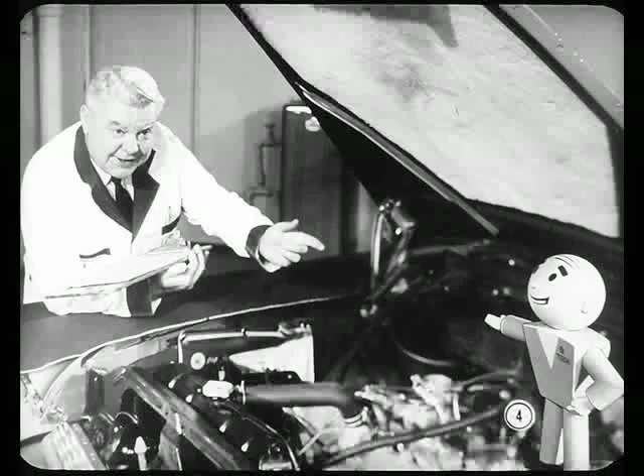Remind yourself to wear those red flannels, Pat. Old man Winter's just around the corner. Oh, I've got a mighty good reminder here, Tech.

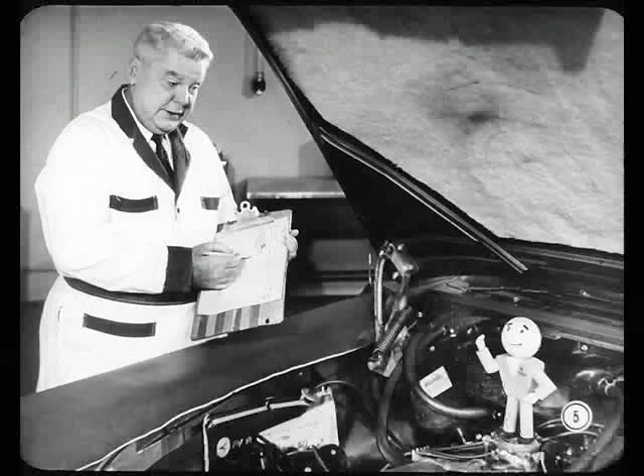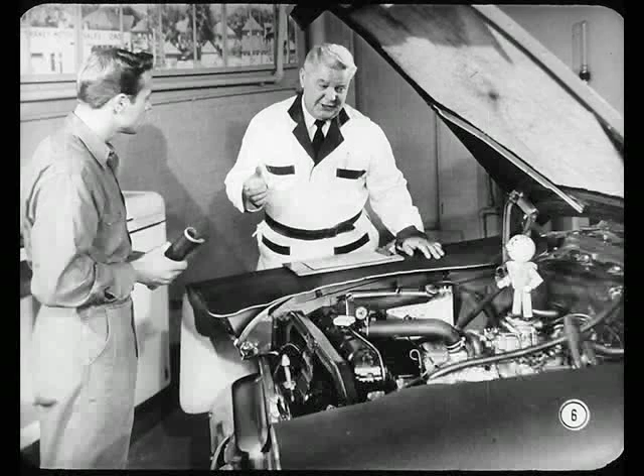This repair order says the heater on this car isn't throwing enough heat. I've asked Ole, the new fellow, to give me a hand with the job. Is he up on all the latest heater changes? Probably not, but we can kill two birds with one stone. We can cover the improvements and operation of '59 heating systems and still give Ole a chance to learn by doing. Just overheard that, Pat, and I accept your offer.

What is the latest dope on '59 heaters? Well, let's take them one at a time, Ole, starting with the one on this car: the hot water heater. It's a full-time fresh air heating system with easy-to-use push-button controls.

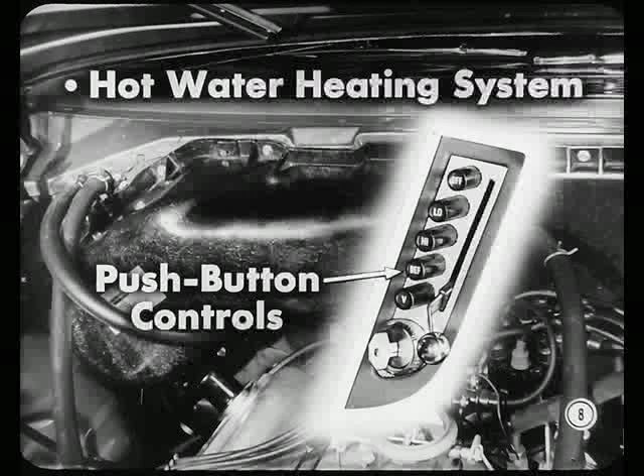Buttons are identified off, low, high, DEF for defrost, and V for vent. These buttons actuate a combination vacuum and electrical control switch. There's also a sliding temperature control lever that operates the water valve by means of a wire cable.

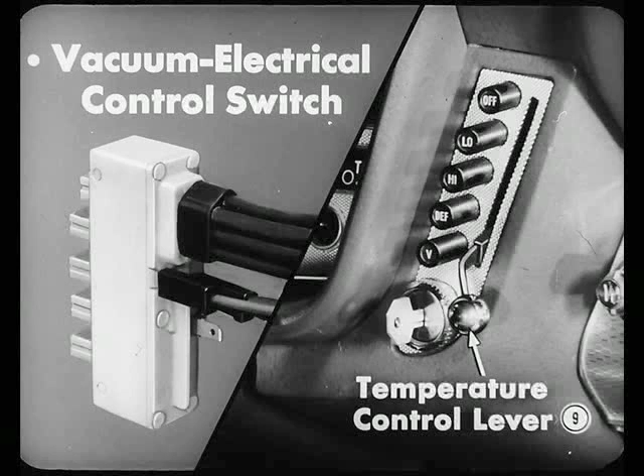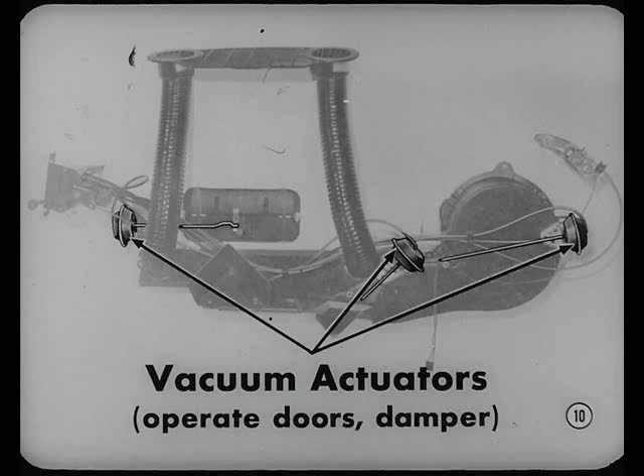Perhaps the most outstanding new change is the use of a group of 3 vacuum actuators. Using vacuum from the engine manifold, the actuators operate doors and the damper in the heating system. Each actuator consists of 2 sealed chambers separated by a rubber diaphragm.

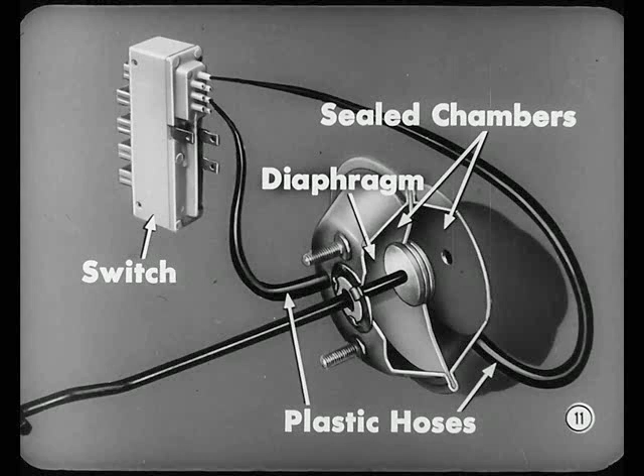Plastic hoses connect both actuator chambers with the control switch on the instrument panel. A sliding valve in the switch opens or vents to atmosphere one chamber of the actuator. The opposite chamber is opened to vacuum when the engine's running. As the diaphragm moves to one side, a rod attached to it opens or closes a door or damper.

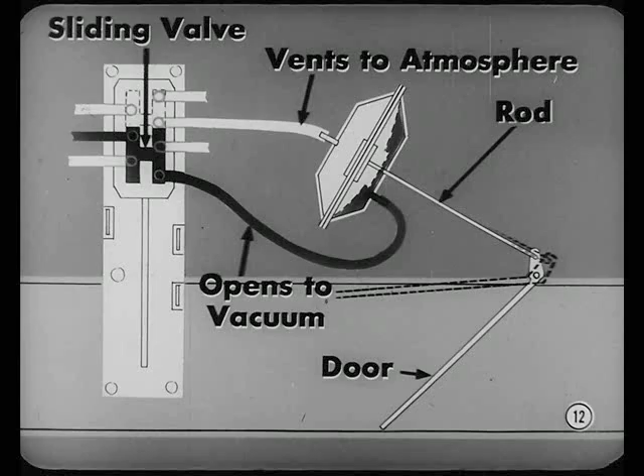I see, Pat. Looks like a neat setup. It is, Ole, and operation's fairly easy to follow. Fresh air enters the cowl intake grill, passes through the plenum chamber and rain trap, and enters the heater core.

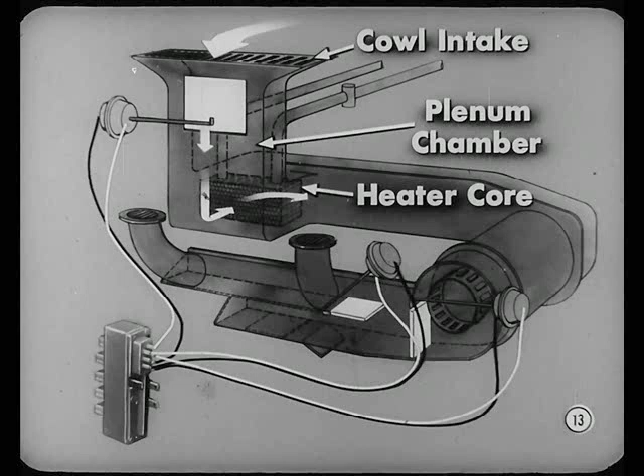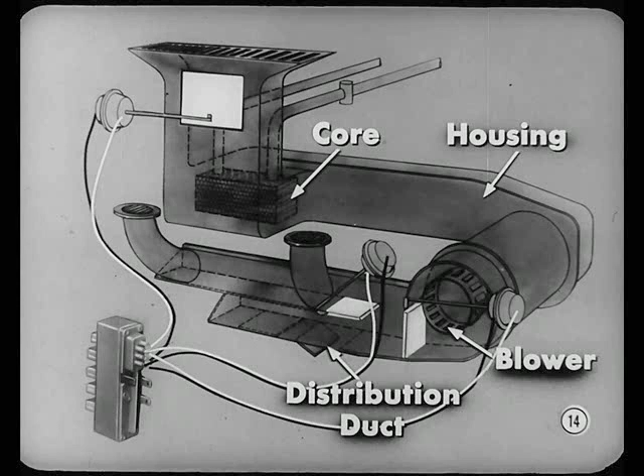From the core, heated air goes through the plastic housing and is drawn through a round hole in the dash panel to the right of the plenum chamber. As air enters the blower intake, it is discharged into the distribution duct. That airflow is easy to follow.

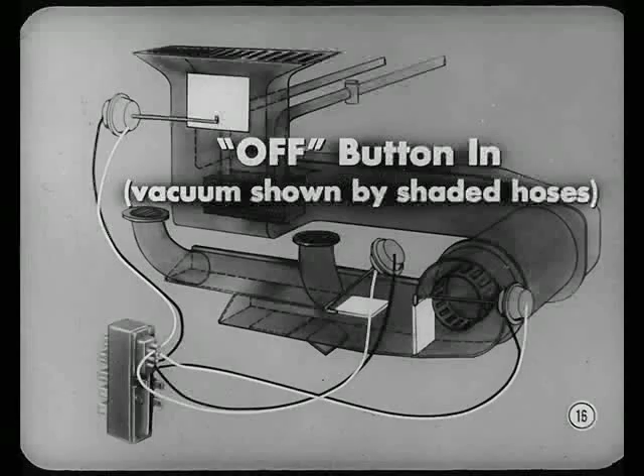But can you fill me in on what happens when those buttons are pushed in? Sure, Ole. Here's a sketch as an example. When the off button is pushed in, vacuum is applied to the sides of the actuators, as shown by the shaded hoses. The fresh air and shut-off doors are closed. The distribution duct damper is raised. The blower doesn't run since there's no completed circuit to the switch, so no fresh air circulates through the system.

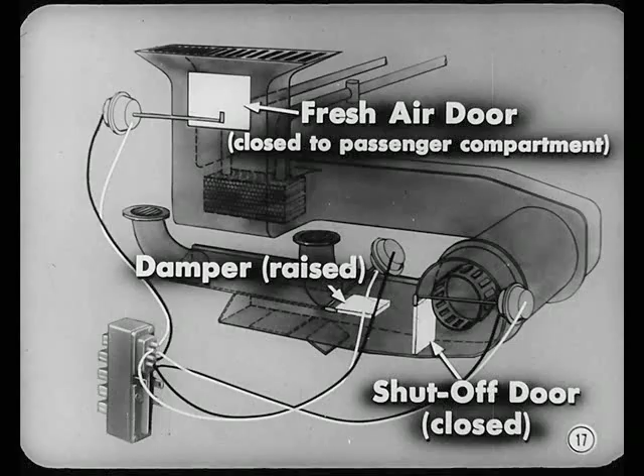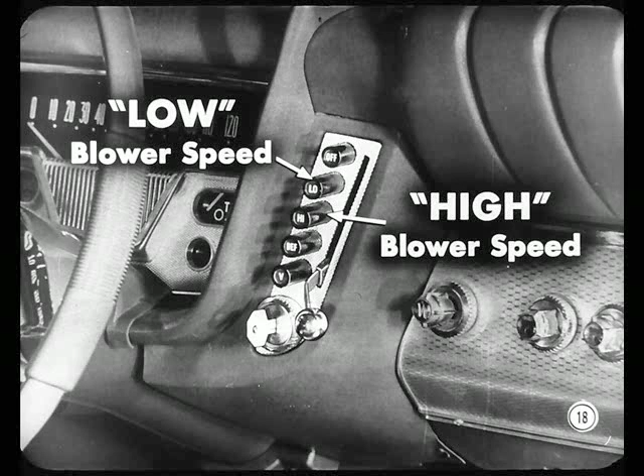When either the low or high buttons are pushed in, the electrical circuit is completed to the blower and there's either low or high blower speed. Also, vacuum is applied to the actuators to direct heated air as follows: the fresh air door is closed, the shut-off door is opened, the damper is raised, and air discharges from outlet slots at the floor. Temperature is controlled by moving the sliding lever toward warm.

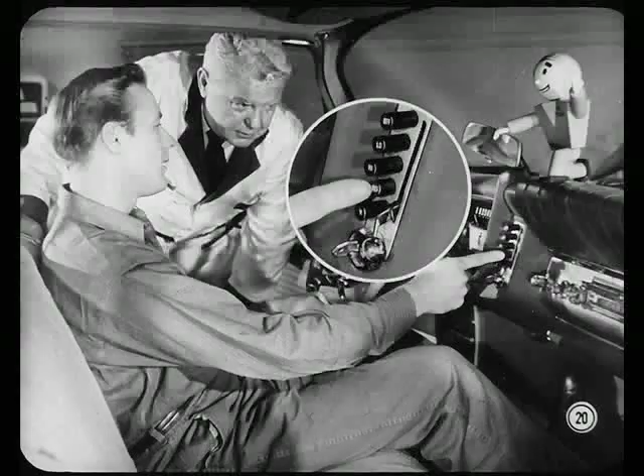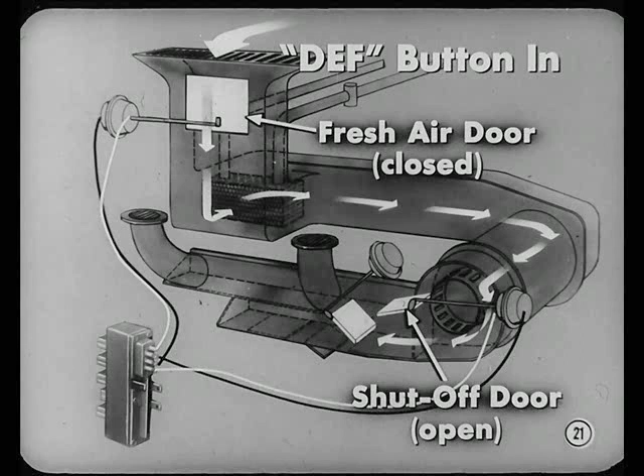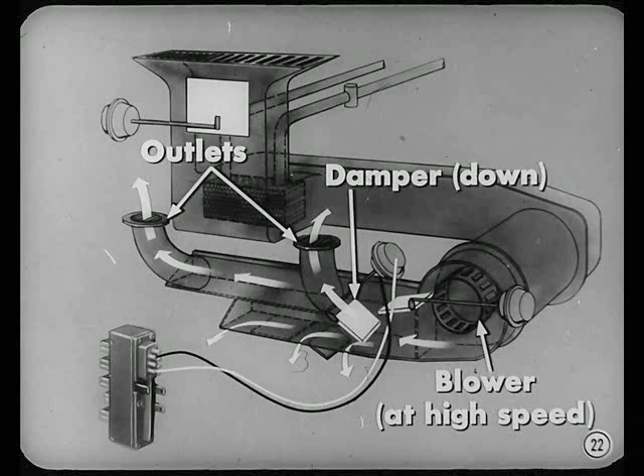Let me see if I can guess my way through what happens when the defroster button is pushed in. Go ahead, Ole. Well, when the defrost button goes in, the vacuum actuators close the fresh air door and open the shut-off door, right? So far, so good. But I'll bet that distribution damper is moved down to send air up to the defroster outlets on top of the instrument panel, huh? Right again, Ole. And the blower would run at high speed. I told you it was easy to figure out.

But pressing in the V, or vent button, is something different, my boy. Better let Pat tell you what happens there. Okay, what is that vent story, Pat?

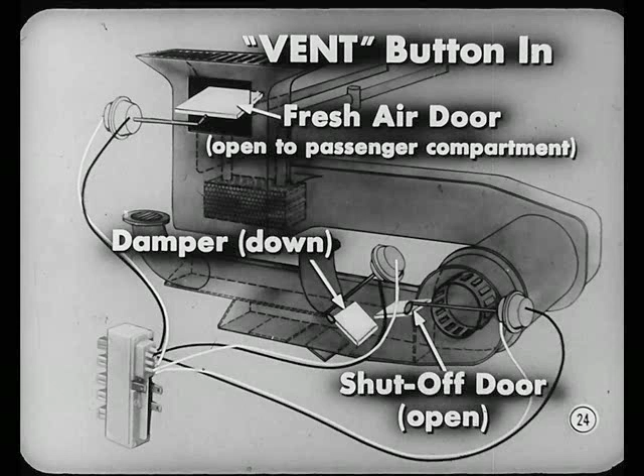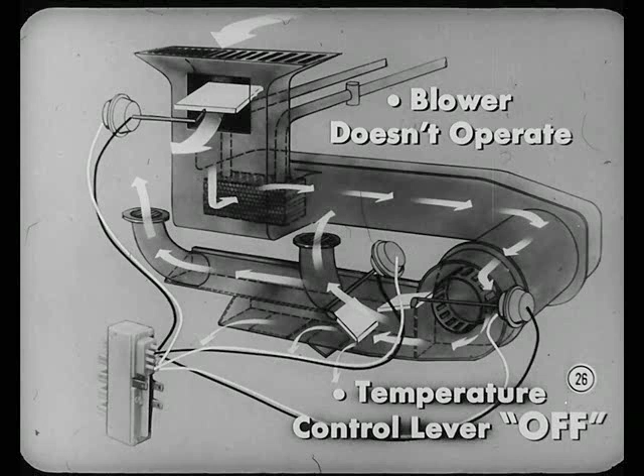Well, when the vent button is pushed in, vacuum actuators open both the fresh air and shut-off doors. The damper is moved down. As a result, ram fresh air is admitted to the interior of the car through the fresh air door and through the distribution duct. Since there's no completed electrical circuit, the blower doesn't operate. The temperature control lever is in its off position. This is a summer setting.

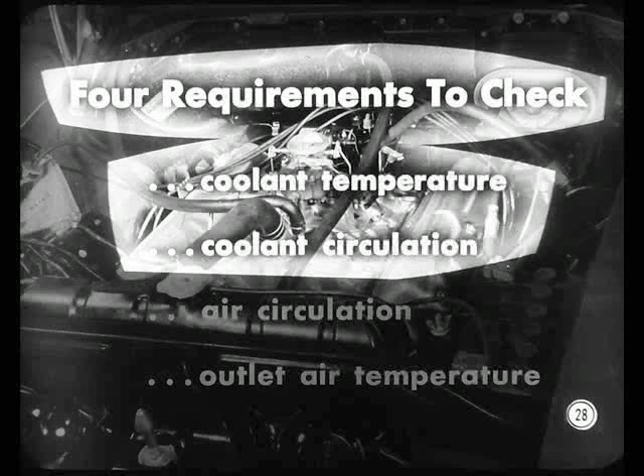Clear enough, Pat. Now, what's up for us on maintenance? Well, on reports of lack of heat or insufficient heat, it always pays to check the 4 main requirements of satisfactory heater operation: engine coolant temperature, coolant circulation through the heater, air circulation through the heater core, and heater outlet air temperature.

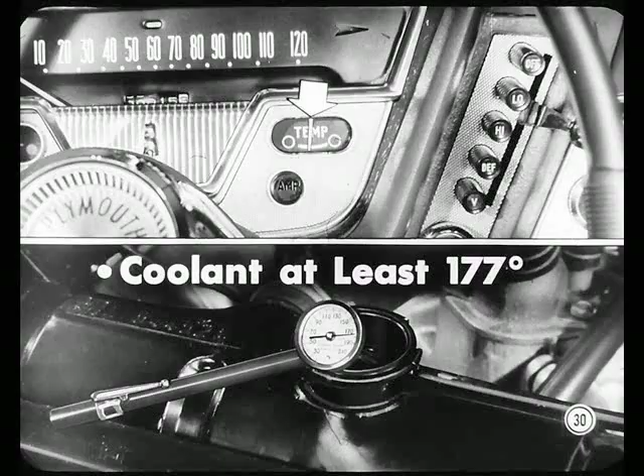So let's start the engine and warm it up to normal operating temperature. Now, when the water temperature gauge needle's between the cold and hot marks, use a thermometer to check coolant temperature in the upper tank. The V8 engines use a 180-degree thermostat this year, so the thermometer should read at least 177 degrees. If you were testing a six-cylinder engine with a 160-degree thermostat, you would read at least 157 degrees.

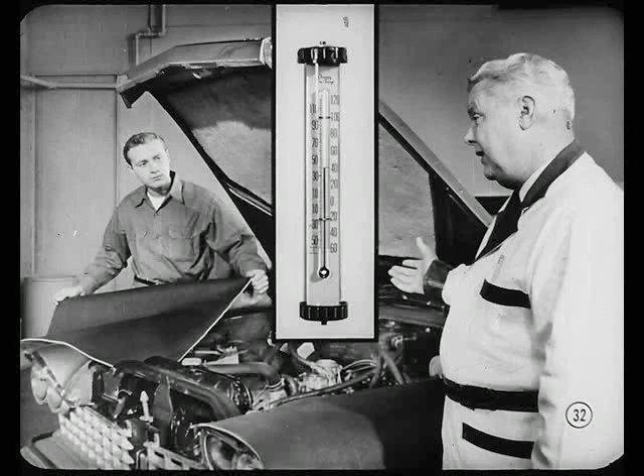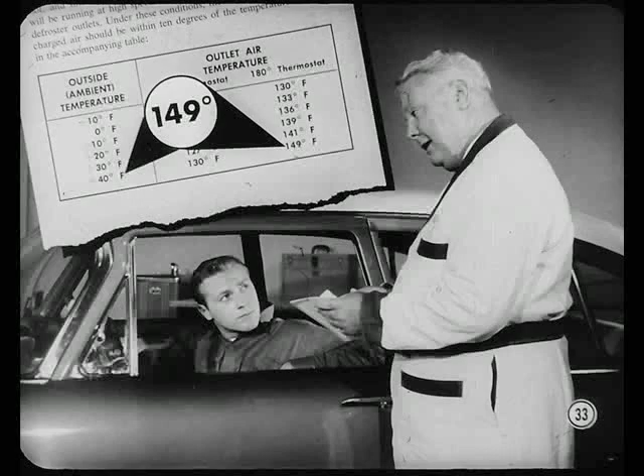I gotcha. Well, our thermometer reads 177. We're okay so far, right? That's right, Ole. So let's move the car outside and check outlet air temperature. It's about 40 degrees outside, and according to the table in this reference book, we should get air at about 149 degrees at the outlet.

Before we take that reading, though, we'll have to run the engine at about 1,200 RPM for 10 minutes. The temperature control lever should be at its maximum heat setting and the defrost button pushed in.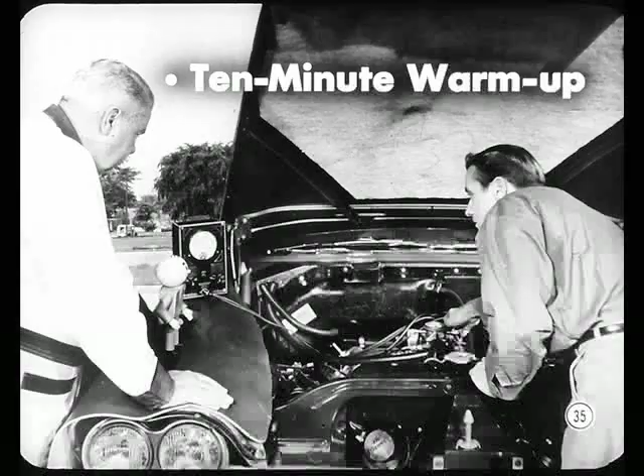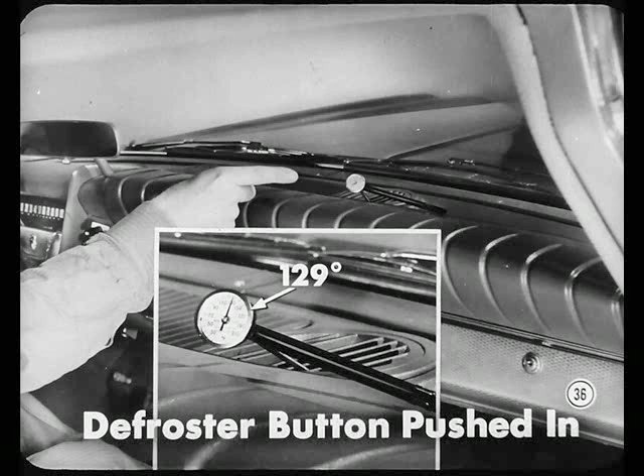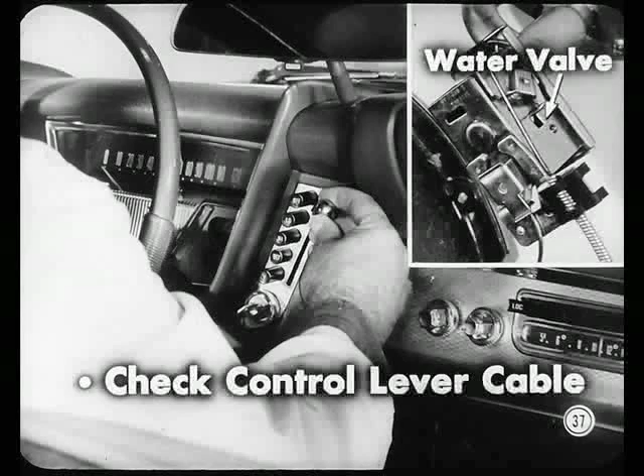Well, I don't know, Pat, but it looks like our heater outlet temperature's a good 20 degrees below the 149 degrees the chart says we ought to have. Anything more than 10 degrees under the specified reading calls for some additional checking. So check the control lever cable and see if it needs adjusting to get a greater opening of the water valve. If that doesn't improve the reading, we'll have to check water flow through the valve and the core.

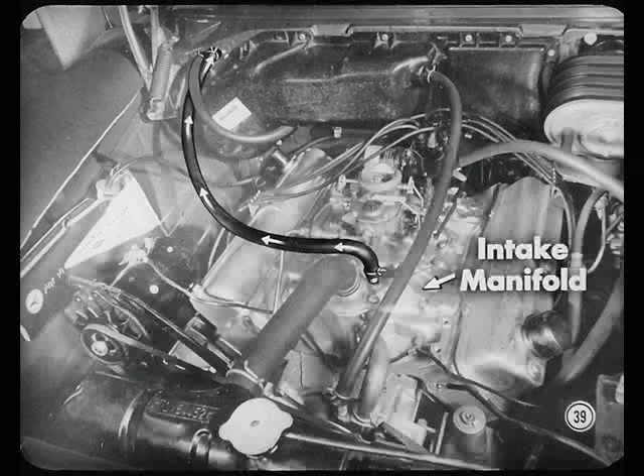Cable adjustment's not right, Pat. I'll change it to let the valve open fully. But if the cable had been right, how would you test the valve and core to see which was at fault? Well, before we get into that, see if the heater hose from the top of the intake manifold is connected to the inlet connection of the temperature control valve.

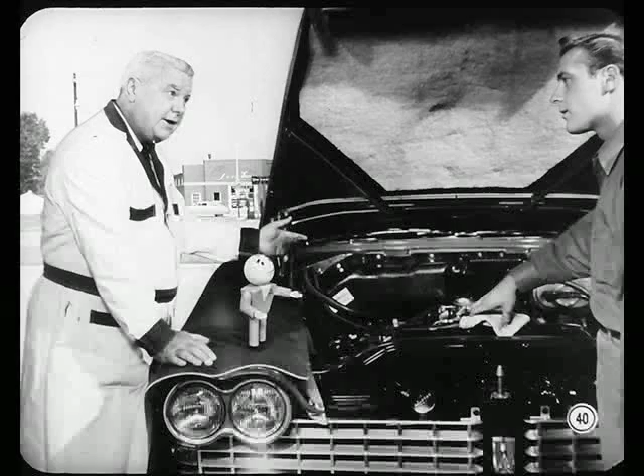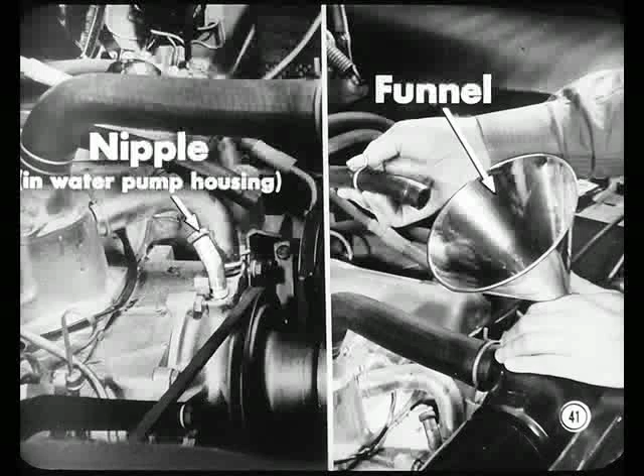It's okay, Pat. Good. Now we're ready to show you how to test the valve and core. First, shut off the engine. Now use a rag to guard against scalding and remove the radiator cap. Remove the heater return hose from the nipple in the water pump housing and plug the nipple, then run the water back into the radiator through a funnel.

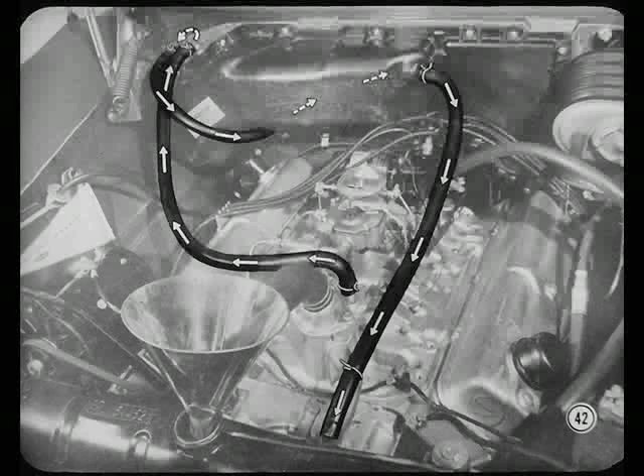Now with this setup, you'll check water flow through both the valve and the core. We'll do it to show you how it works. I'll start the engine and run it again at 1,200 RPM. The temperature control lever is off, which should cut off water flow from the heater hose. There's no water flow, Pat. The valve closes okay. Good.

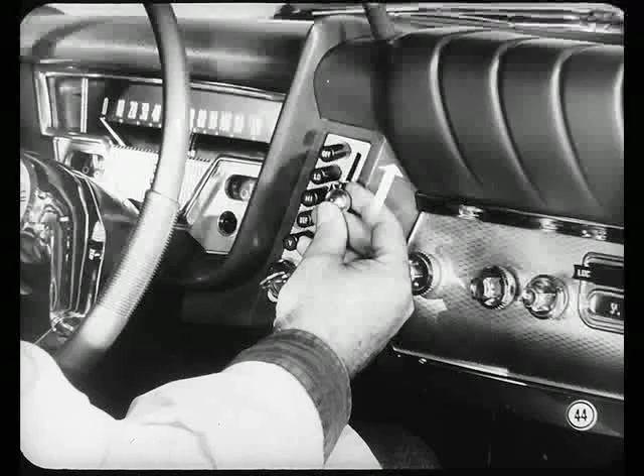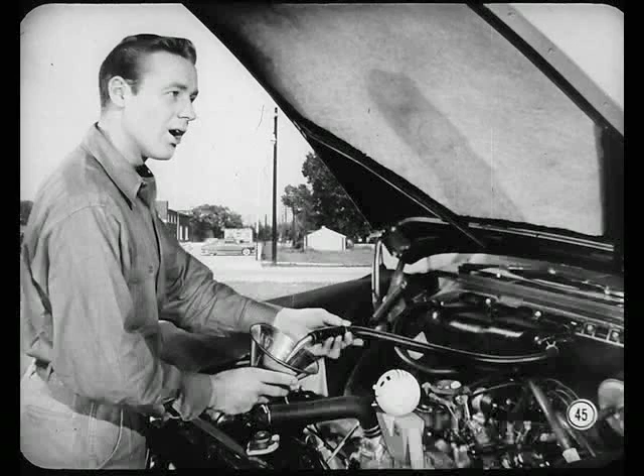Now I'm moving the control lever to its warmest setting to open the valve. Water flow from the hose should be at its greatest. If it isn't, we'll have to check the valve and the core separately to see which is at fault. That's not the answer here. Water flow's good, so the valve and the core are okay, but how would you check each one separately?

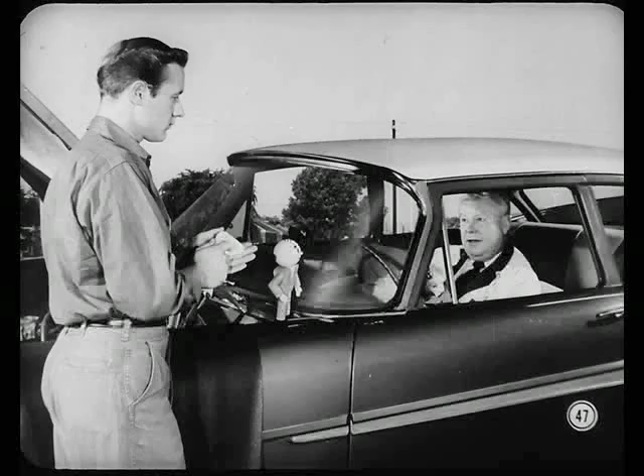You'd disconnect the outlet hose at the valve and flow test the valve, then flow test the core. No need to worry on this job, though. Water flow is okay, and our outlet temperature is right. So our work on this car is done. I'll shut off the engine.

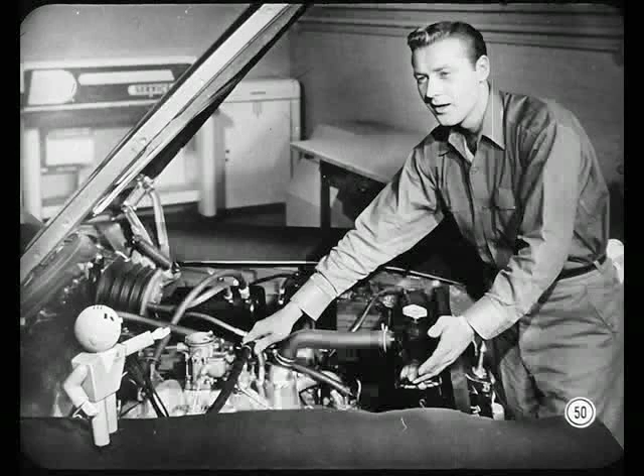Well, we were sort of lucky on that car, but this car is a horse of a different color. I've gone through the same steps, up to the point of flushing the heater core, and so far it hasn't helped. I suppose we'll have to drain the heater core and flush it out, huh?

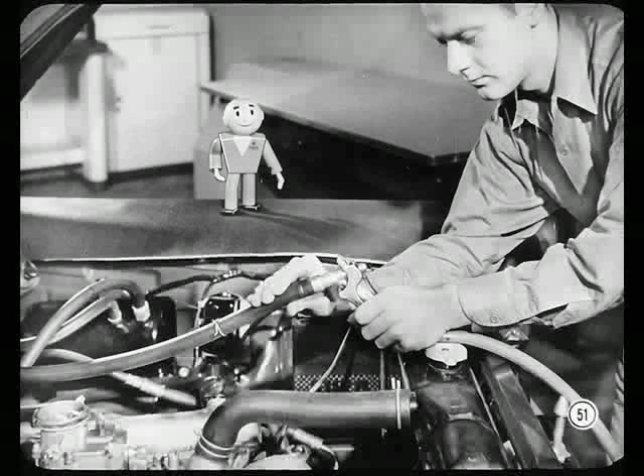Right. So disconnect the heater hoses at the engine and at the control valve. Better save the antifreeze, because it's probably fresh. Reverse flush the core with short bursts of water for about 5 minutes, then flow water through at steady pressure for another 5 minutes. That ought to do it.

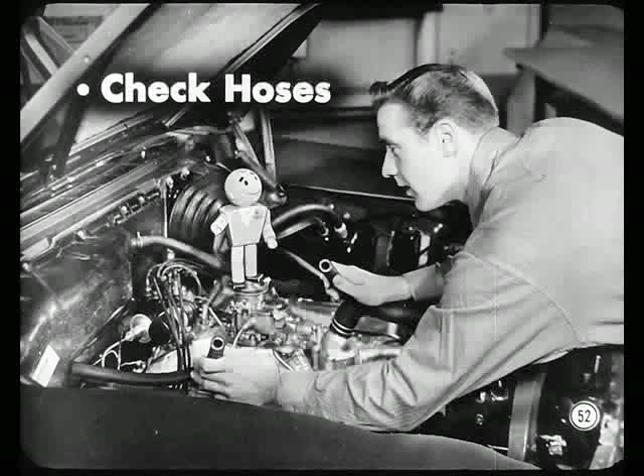Check the condition of the hoses. If they are partially plugged or damaged, replace them. No need to install new hoses, Tech. These are in fine shape and free from plugging.

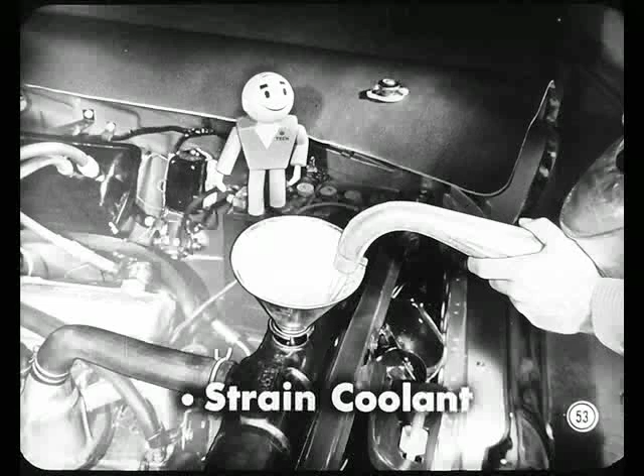Well, next, strain the coolant before you pour it back. Then we'll run the engine and recheck heater operation. All right, will do.

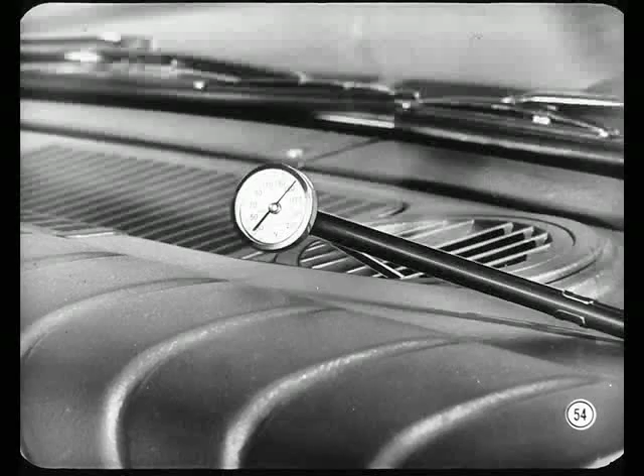Outlet temperature's okay now, Pat, but there still doesn't seem to be enough airflow into the car. Then we'd better check air circulation, beginning with the blower motor. Shut off the engine.

Check those motor connections, Ole. They must be clean and tight, same as any electrical circuit. Otherwise, that motor won't run fast enough. If the motor didn't run at all, we'd check for a blown fuse, naturally. Nothing wrong electrically. No loose or corroded connections.

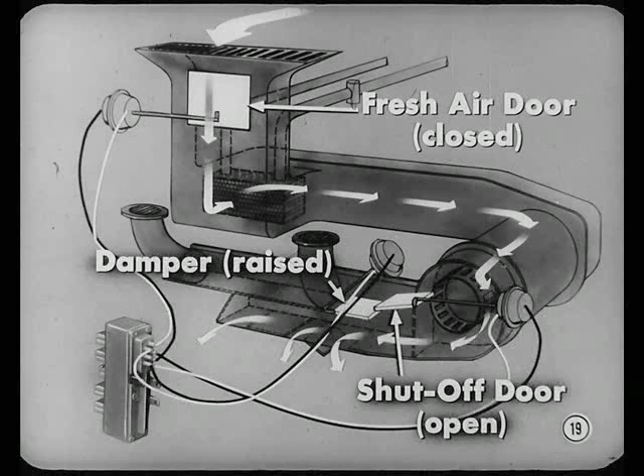Well, that leaves only one possibility. The damper should be raised, the shut-off door should be open, and the fresh air door should be closed. If they're not positioned that way, disconnect the actuator rods at the doors and damper. Then try to move the doors and damper by hand. If they move freely, then we'll have to check for a vacuum leak.

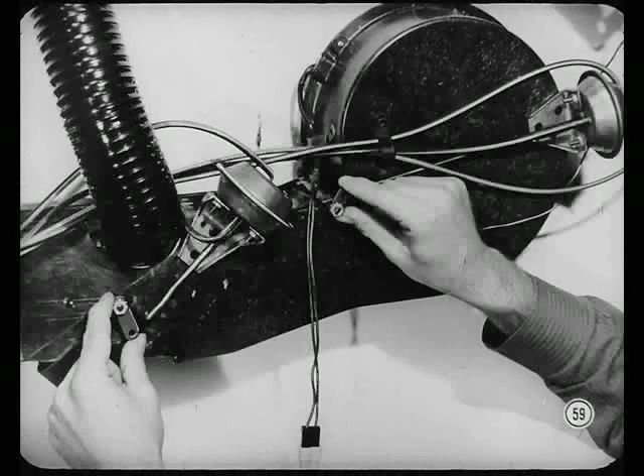Well, I can move the doors and damper all right. No binding or interference anywhere. How do you make that vacuum check? With a gauge? You just answered your own question, my boy. Start the engine.

Remove both hoses from an actuator. One is vented to atmosphere, but the other should show vacuum pull. Install the gauge and see if you get a manifold vacuum reading. Check each actuator that way.

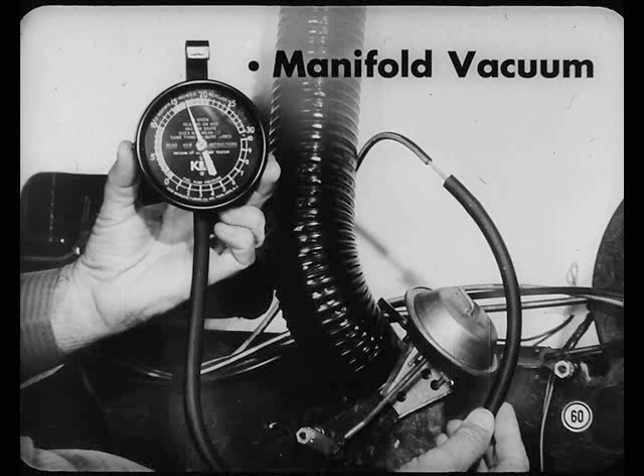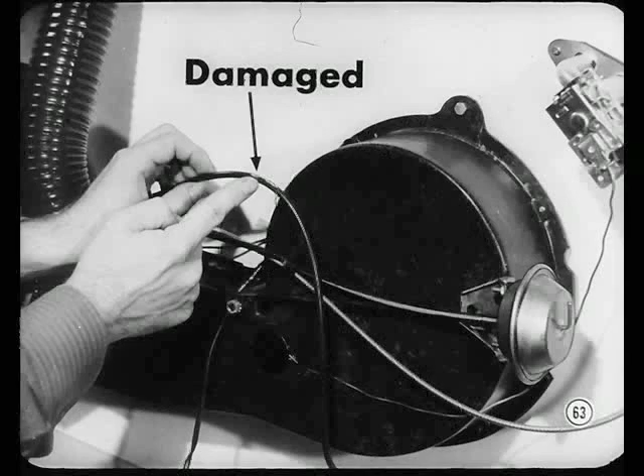Since we don't get a reading on this hose, it must be the guilty one. Must be, Ole, because that actuator works the shut-off door. No wonder the heater didn't throw enough air. And here's the trouble—this plastic hose is damaged.

Shut off the engine. Replace the hose assembly. Install it carefully and fully on the actuator connections. Then we'll check airflow at the outlet. Let her go, Ole.

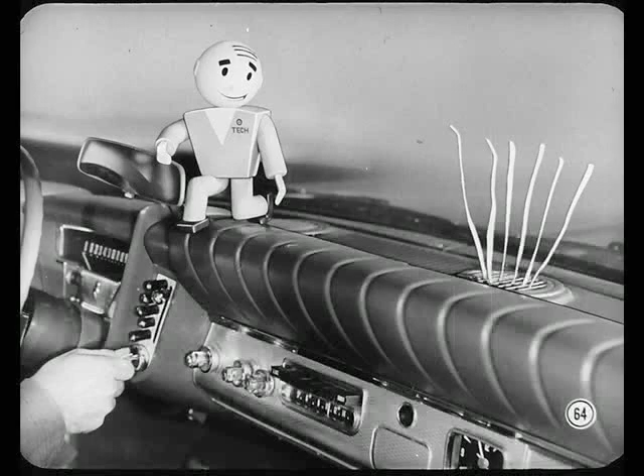Installing that new vacuum hose really did the trick. We've got a full-fledged gale blowing out of here now. Good news, Tech, that wasn't so hard to fix. Yeah, we can cross this job off as done.

Hey, while we're on the car heating systems, we ought to talk about the heater section of the new air conditioning system, also the instant heater. Never can tell when one of those might come in. Well, is the heater section of the air conditioning system much different? Well, it's got some differences, all right, Ole.

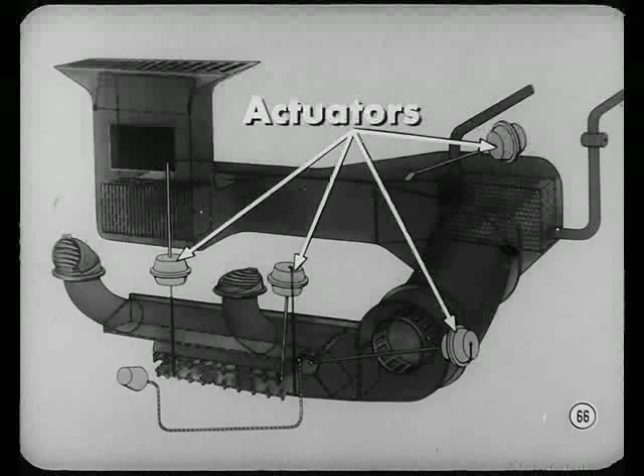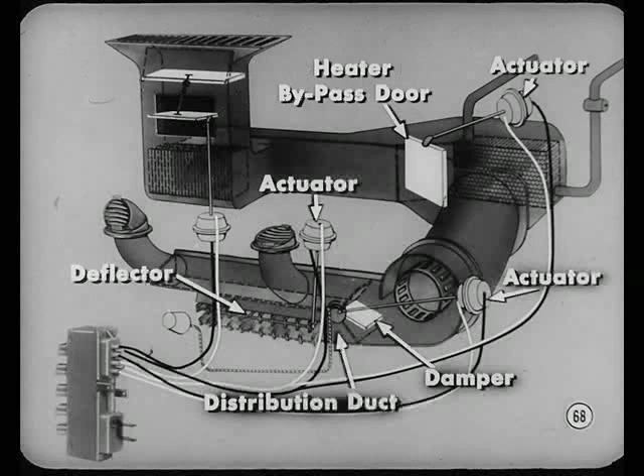For one thing, 4 vacuum actuators are used in the combination cooling and heating unit. One actuator operates the fresh air and recirculating doors. These are so connected by adjustable linkage that when one door is open, the other is closed, and vice versa. Separate actuators also operate the heater bypass door, the distribution duct deflector, and the distribution duct damper.

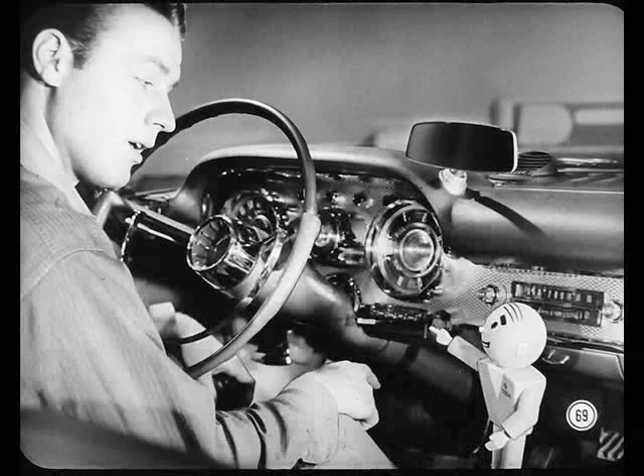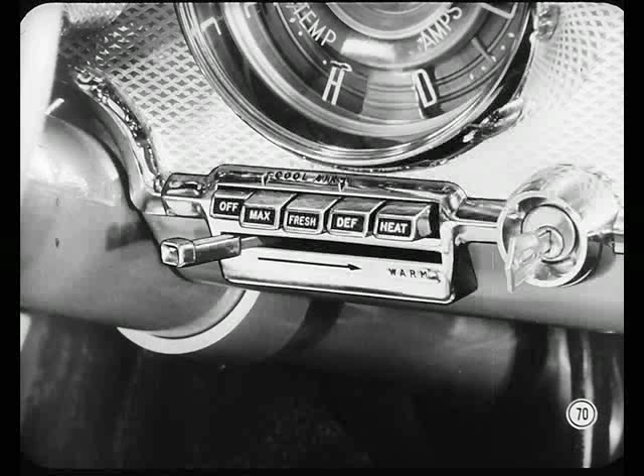Oh, then the flow of air is probably different, right? That it is, my boy. But you'll find it a cinch to follow once you know what happens when certain buttons are pushed in. The switch is like the other deal, a combination electrical vacuum setup, huh? That's true, Ole. But the buttons carry different identification, and the blower switch operation is different. Instead of a high and low button for blower speeds, the sliding temperature control lever operates the blower switch.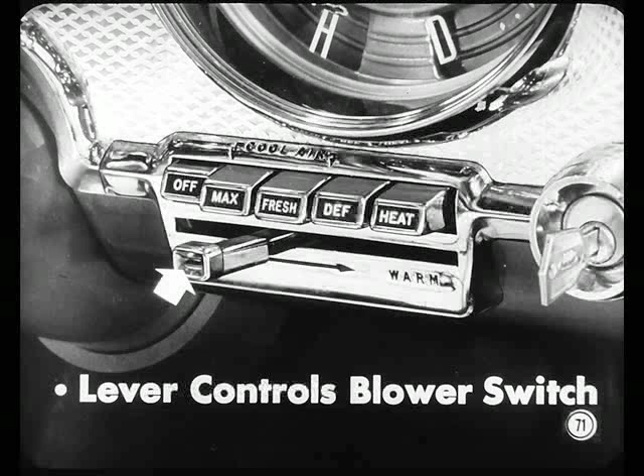There are 2 types of switches used, 2-speed and 3-speed. The 2-speed switch provides low speed when the lever's pushed in, high speed when the lever's pulled out. And the 3-speed switch provides low speed when the lever's pushed in, pulled out to the first notch is medium speed, and all the way out is high speed.

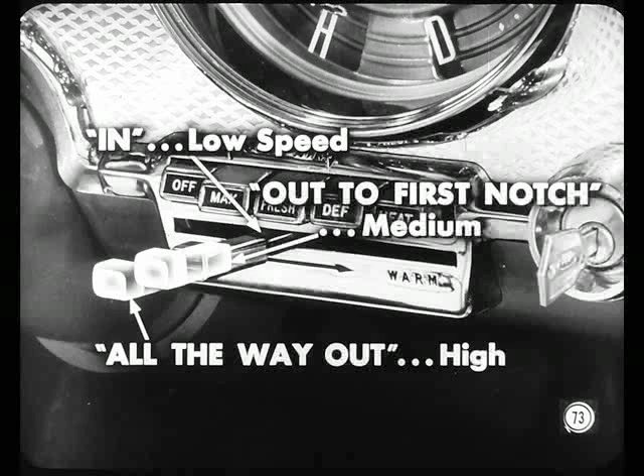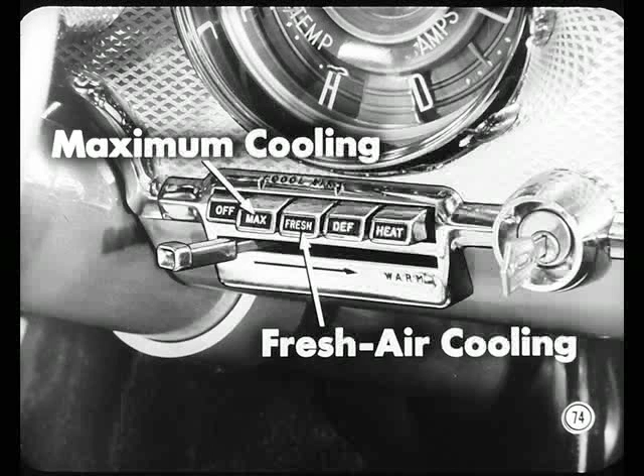What's max and fresh stand for? Air conditioning controls, Ole. Max is maximum cooling, and fresh means fresh air cooling. You can forget those where car heating is involved.

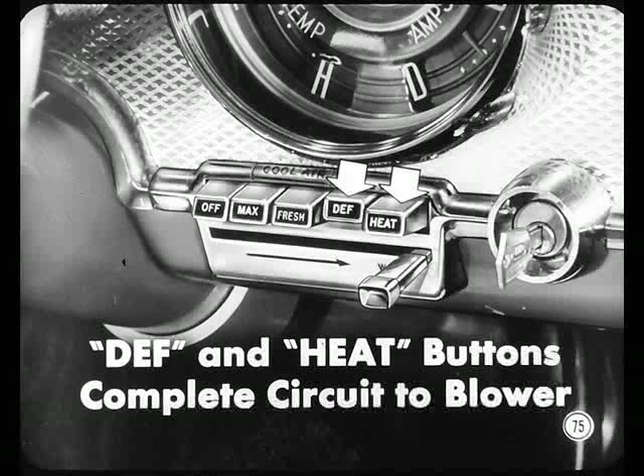Yeah, Ole, let's take the defrost and heat buttons, for instance. When either one is depressed, it completes the circuit to the blower switch. Presto, circulation of heated air is provided. Supposing the off button is pushed in—well, then vacuum operates the actuators that move the fresh air and heater bypass doors, the distribution duct damper, and the deflector. Shaded hoses on this sketch make that clear.

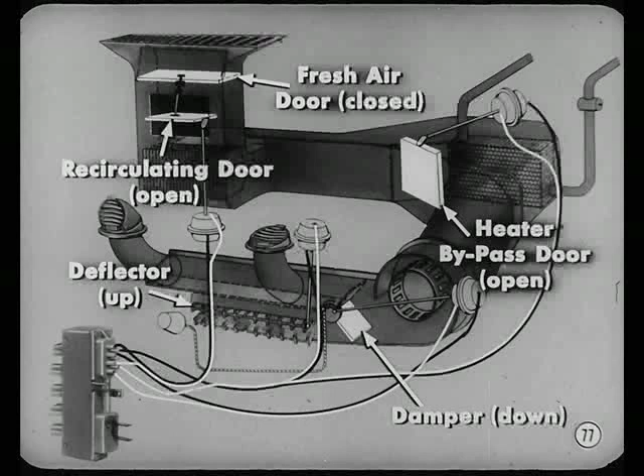In brief, Ole, the fresh air door is closed, the recirculating door is open, the bypass door is open, the damper is moved down, the deflector is moved up. Closing the fresh air door means no fresh air can be admitted. And since the blower isn't running, no circulation takes place.

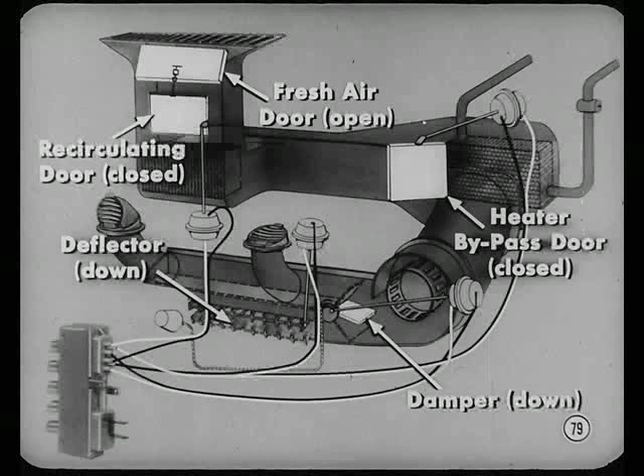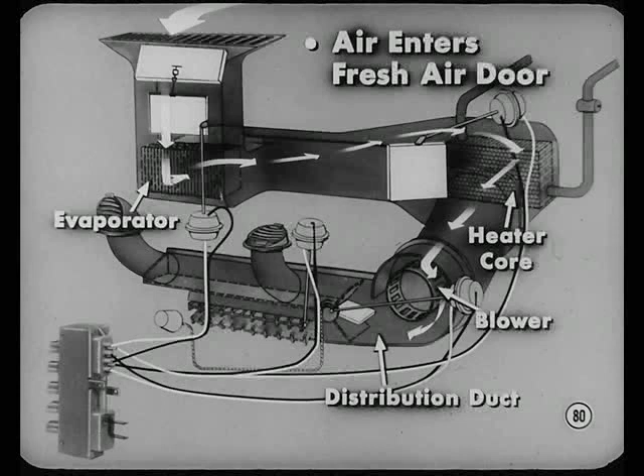Pretty clear, Pat. Now, how about the defrost button? How's that work? Well, when the defroster button's pushed in, the fresh air door is open, the recirculating door closed, the bypass door is closed, the damper and deflectors are down. In this defrosting operation, air enters the fresh air door, goes through the evaporator and heater core, and then to the blower and into the distribution duct. Now, the damper channels most of the hot air to the defroster outlets. A small amount is discharged through the lower outlet.

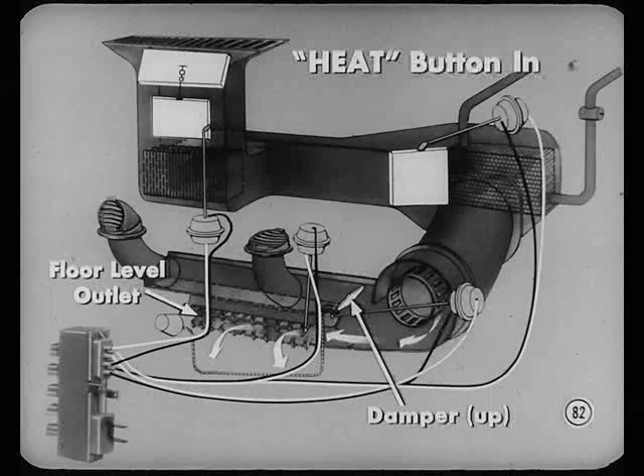This proportion can be adjusted on most models by turning the knob on a control cable connected to the damper. You follow that? Sure, Pat, still with you. Okay, now with the heat button in, you get the same actuator operation as defrost, except that the damper is moved up. In this position, all heated air is directed through the floor-level outlet. You can't adjust the cable to direct any air for defrosting when the heat button is in.

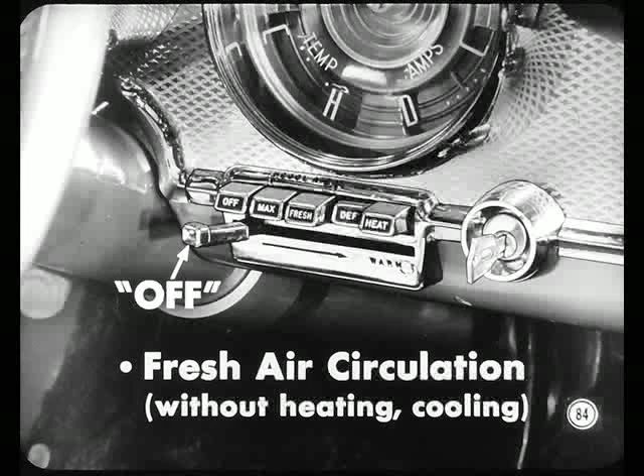Now, how much heat is delivered when either the defrost or heat button is in, naturally depends on the control lever setting in its slot. Here's something else: if you move the control lever to off, you can use the defrost or heat buttons to get fresh air circulation without heating or cooling the air. I see, you can get almost any combination you want.

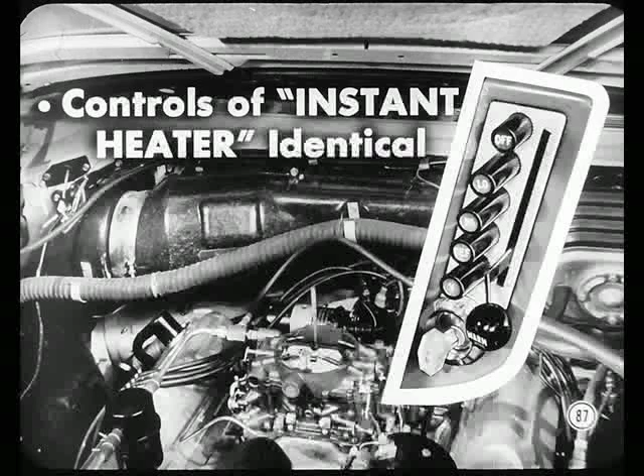I suppose that service on this heater section, then, is quite a bit different. You suppose wrong. It's tackled a lot like the hot water heaters you just fixed. That's right. Now, how about something on the new instant heater that delivers heat a few seconds after the engine's started? Suits me, Pat, what's the dope? Well, push-button controls of the instant heater are identical to those on the hot water unit.

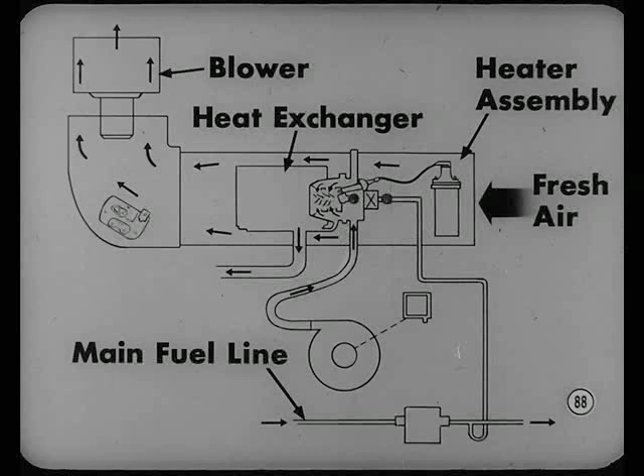Heating, however, is done by a gasoline burner. Gas is pumped from the main fuel line and burned in the heater assembly. Fresh air from the cowl intake is drawn across the heat exchanger by a blower inside the car. I get it—air is warmed by being drawn across a heat exchanger instead of through a heater core. Well, that's one basic difference, Ole. The doors, damper, and vacuum actuators still work the same as on the other heaters.

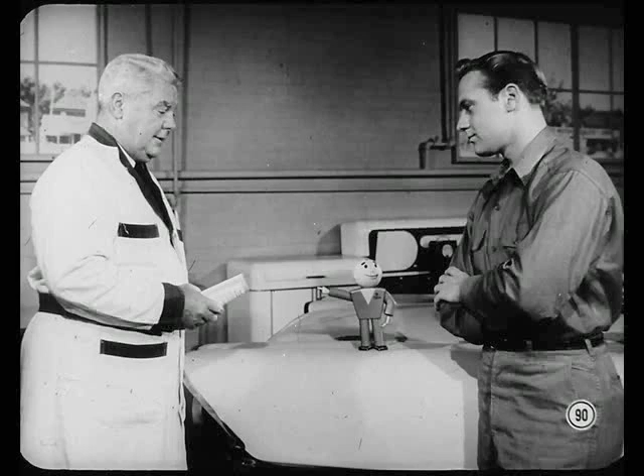Any other differences, Ole, along with useful service tips on all heaters, are explained in this reference book. A little study on your part will do the trick. In addition, if you and all our technicians practice up on these heater procedures right now, our owners will warm up to us in more ways than one.